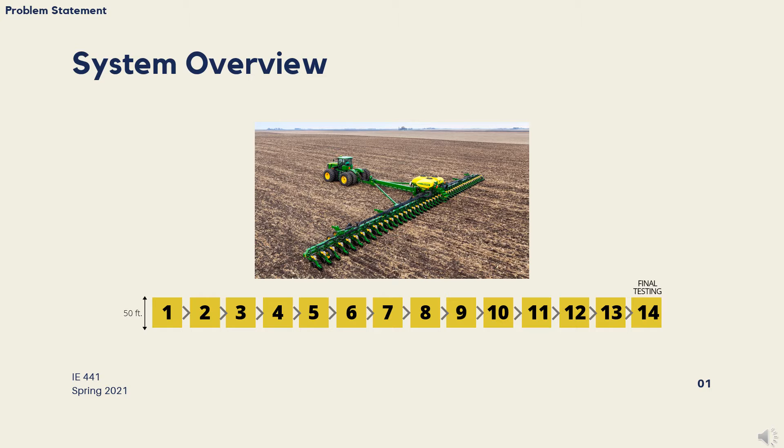In the current system, planters travel through a 14-station line where they are assembled. Each planter is attached in pair with an MGV tugger to travel between each of the 14 stations. And at the end, an MGV tugger travels back to Station 1 after the planter is completely assembled at Station 14. The current MGV tugger conveyance system is approaching the end of its life cycle and impending failure. The fleet is 20+ years old and increasingly costly to maintain, with 7 tuggers already having been decommissioned.

So we were tasked with finding an alternative conveyance system that 1. Reduced the number of reported safety issues by 20%. 2. Had the capacity to move planters that are 10% heavier, that is, 50.5 thousand pounds. And 3. Reduced the operational costs of conveyance by 20%.

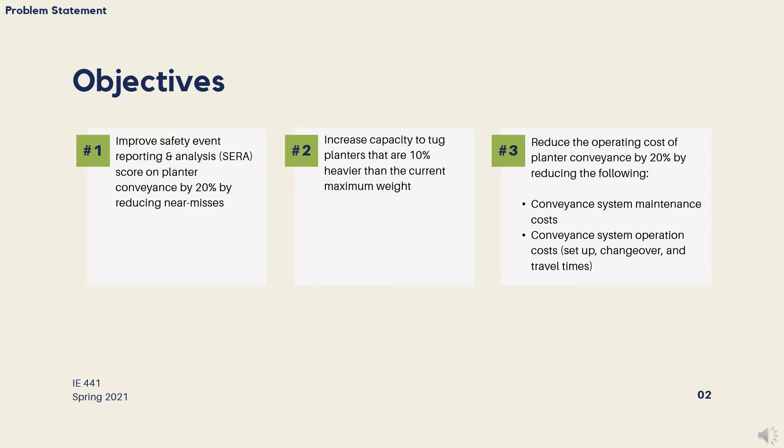Conveyance operational costs collected and calculated during our current state analysis create a baseline to compare alternative conveyance methods. Our current state analysis confirms the increasing tugger fleet maintenance costs. Analyzing conveyance safety reports allowed us to categorize 30% of near misses due to low operator visibility and 60% of near misses due to improper tugger planter attachment. We will address these safety concerns in the following slides.

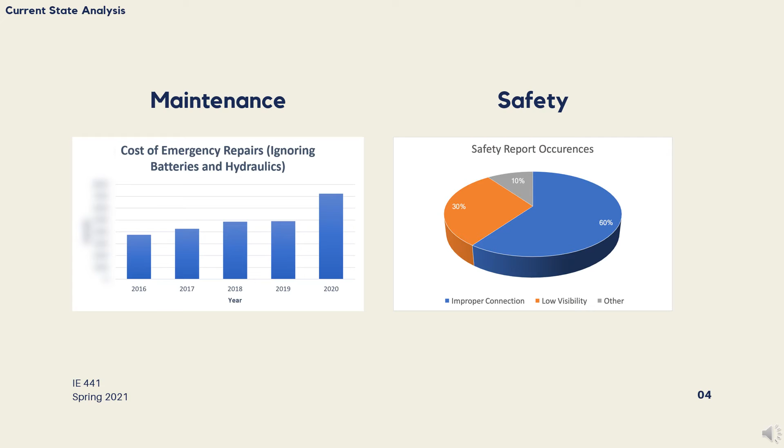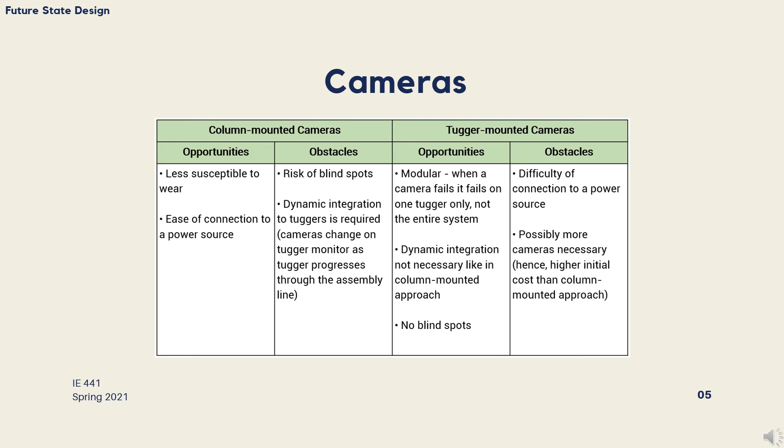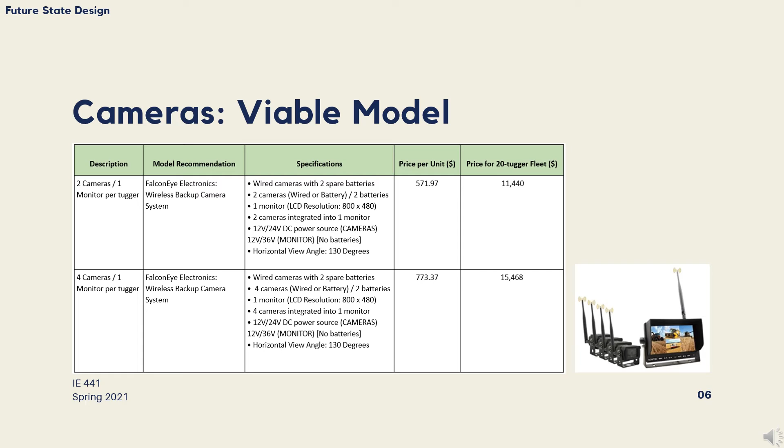Low visibility, accounting for 30% of near misses, can be addressed by tugger mounted cameras. We suggest installing cameras on telescoping arms mounted on top of the tugger that are connected to a monitor inside of the tugger. These cameras can be adjusted to give an operator a full range of visibility between tugger and the planter. These cameras act like reverse cameras in modern cars, so we just suggest implementing the pictured model, 4 industrial truck cameras and 1 monitor for each tugger in the fleet.

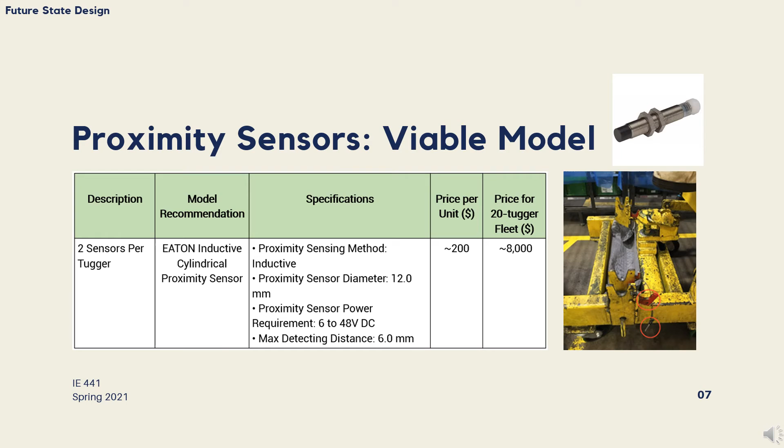Improper tugger planter attachment, accounting for 60% of the near misses, can be addressed by proximity sensors. The attachment mechanism utilizes a swivel bracket and 2 pins. A proximity sensor can detect when a pin is not properly connected and raise an alarm or prevent tugger motion. We suggest implementing 2 proximity sensors per tugger, 1 sensor for each pin. Additional safety features such as mirrors and swivel seats are an affordable way to improve safety by increasing visibility, and these are 2 additional options outlined in our work.

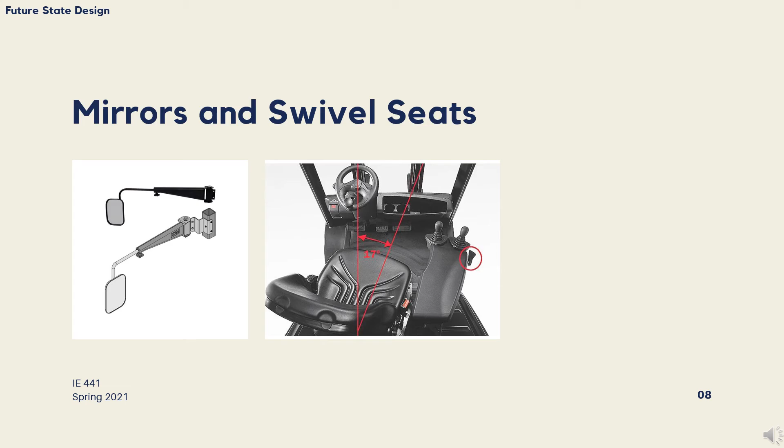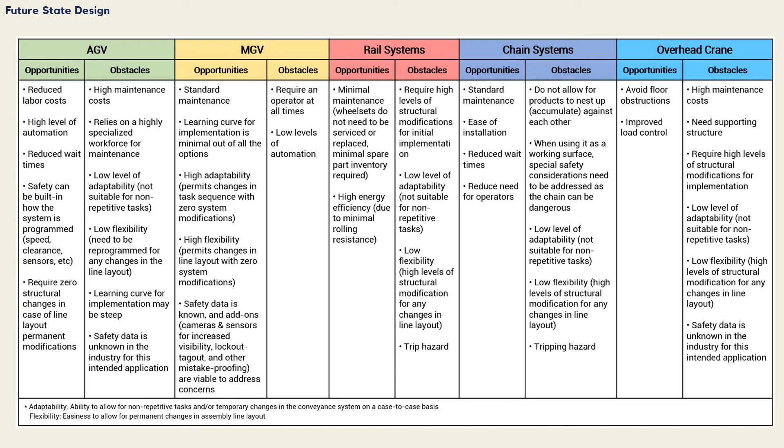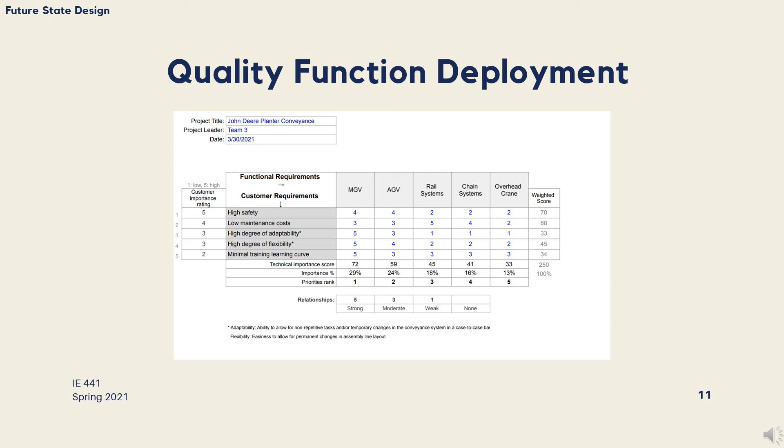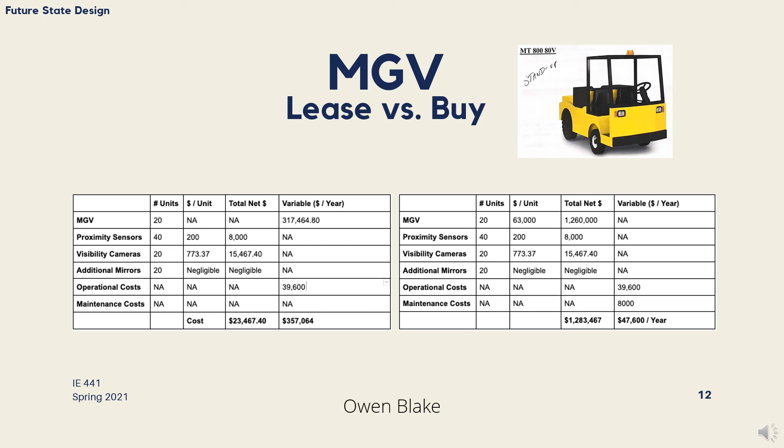We considered MGV, AGV, rail, crane, and chain combined systems in our alternative analysis. We compared the customer requirements and functional requirements using quality function deployment and determined that MGV and AGV fleets are the best alternatives. We gathered quotes for leasing and purchasing an MGV fleet capable of tugging 50,000 plus pounds. The operational costs, cameras, and proximity sensors are all included as costs in each option.

Leasing an MGV fleet has a lower initial investment cost than purchasing a fleet, but it quickly becomes more expensive than buying the fleet outright. We suggest purchasing a fleet if an MGV conveyance alternative is selected.

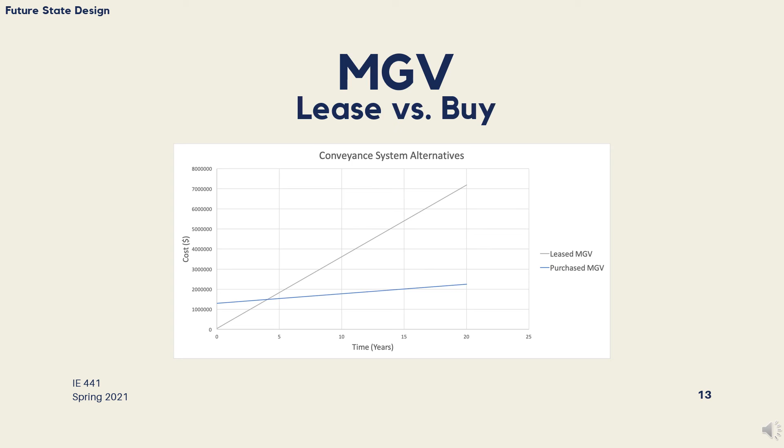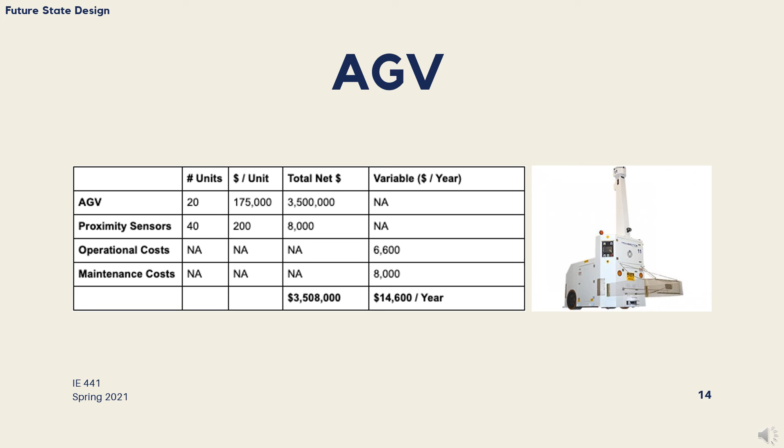We gathered quotes from Transbotics to purchase an AGV fleet that fulfilled the capacity requirements previously mentioned. The cost of proximity sensors is included, but travel, changeover, and camera costs are eliminated with this method. An AGV fleet has the highest initial investment cost, but has the lowest variable cost. It automates safety and therefore fulfills our number 1 objective. If this AGV fleet is within budget, then we suggest this conveyance alternative. Otherwise, we suggest purchasing an MGV fleet.

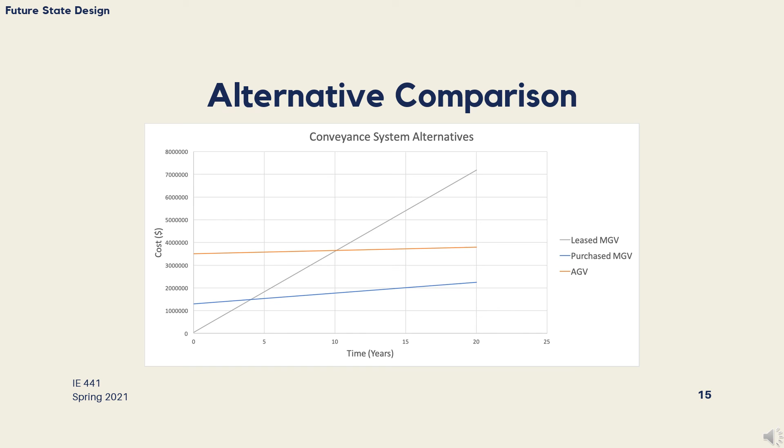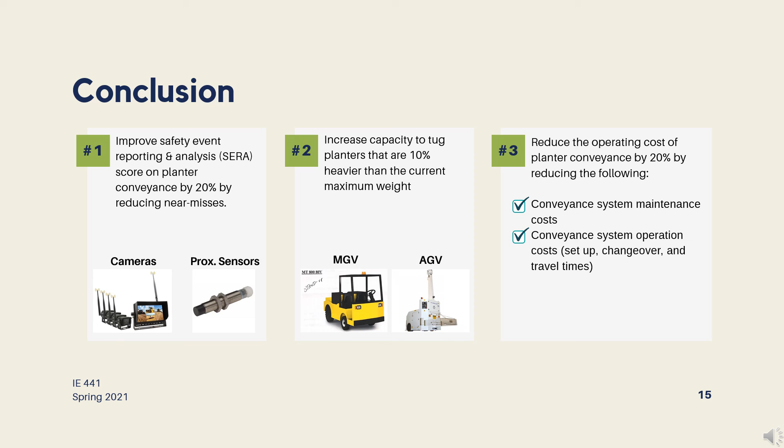We addressed Objective 1 by suggesting implementing proximity sensors and cameras or automation to reduce 60 and 30% of the recorded safety near misses respectively. We addressed Objective 2 by sourcing conveyance alternatives capable of moving 50.5 thousand pounds, allowing for growth and flexibility in the future. We addressed Objective 3 by including an AGV conveyance alternative that is estimated to reduce operational costs by 85% compared to the current conveyance method.